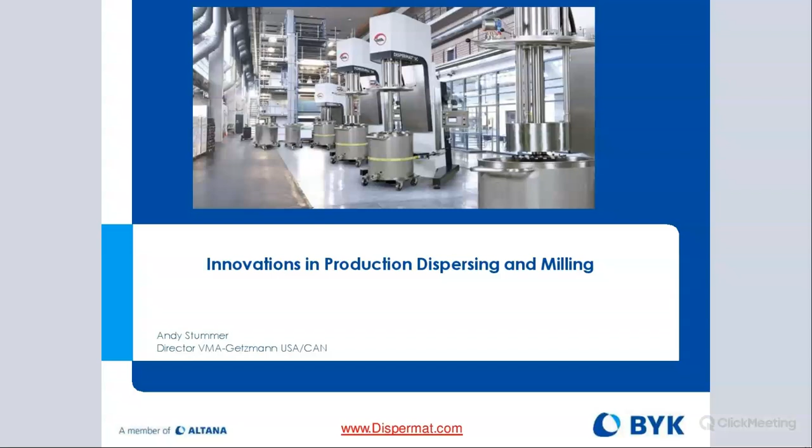Today we're going to talk about the innovations of production technology, and about the different dispersers and basket mill systems available for larger scale production. With that, we go right into the next slide.

We'll also have the latest and greatest laboratory models we offer on display: the new CV3 Evo that just came out, the new CN and AE lab scale dispersers, and the basket mills. So if you're over there, or have colleagues who work out of Europe, please feel free to stop by, drop in, let's have a cup of coffee, and I can give you a tour of what we have to offer.

Basically, we're going to first do a brief introduction about VMA and the relationship with BYK. Then we'll go briefly into a dispersion process overview, talk about the equipment side, and finally close off with the lab and pilot resources we offer. We have a really nice lab up in Wallingford, Connecticut at BYK USA, so we're going to talk about that and what capabilities we offer.

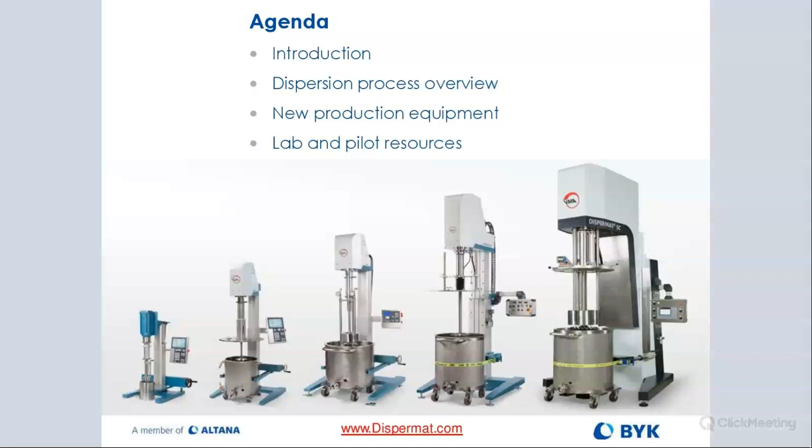So with that, we're going to look at the founding couple of VMA, Mr. Hermann and Elke Getzmann. Back in 1972 they founded this company, VMA Getzmann. Hermann still comes into the office about once a week just to make sure they still follow his design philosophy. He's a pretty nice man, and sharp, and he still walks around the facility like the day when he opened it up back in 1972.

Down below is the first Dispermat, introduced in 1973, and we still have customers - I've visited them myself - that are still running original Dispermats. So the motor technology is really sound, and these units will last forever.

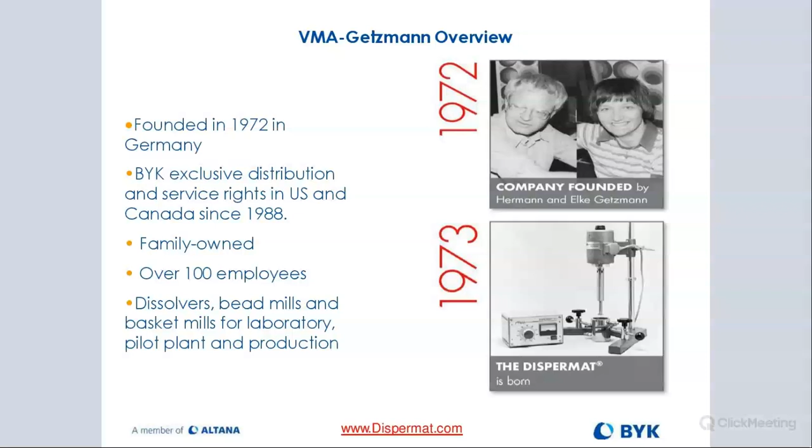About 40% of everything that VMA builds today is custom. So there's a lot of new end-use markets with different types of requirements, like fuel cell and battery, that have very special needs. So VMA is on top of those requirements and needed more capabilities from a manufacturing and design standpoint, so they had to add that space to support these new growing markets.

They also have a really good lab space in Germany and the pilot facility. So if you have colleagues over there that want to come in and visit VMA and run some trials, let us know and we can set that up. We have a number of people that come in every year, US colleagues that have businesses over in Europe, that would take advantage of that lab capability.

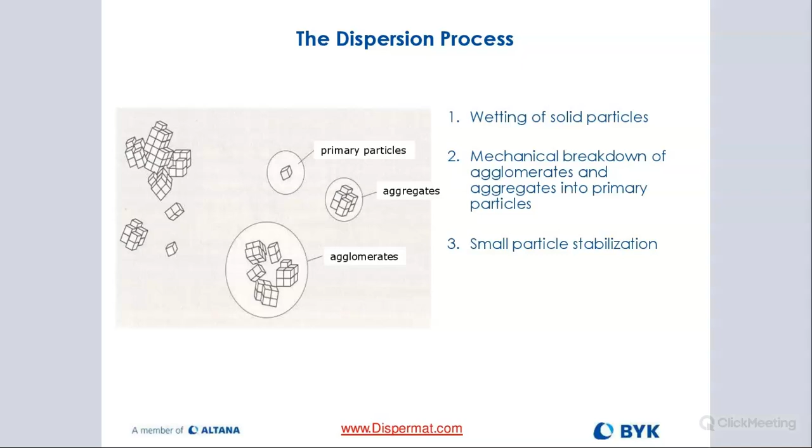Obviously, once you separate the particles, it's really important that we keep those particles in a suspended state, which requires some type of additive. Our sister company, BYK Additives, has a good selection of various additives for different markets like inks and coatings, just to name a few. And now with batteries, Erin Kelly, if you know her, they can offer some really good solutions to ensure that these particles stay in a suspended state.

In the case of a horizontal mill or a nano basket mill, particles as low as 100 nanometers and less with the right setup. And again, stabilization of the particles is critical to ensure that they don't flock back together and form new clusters.

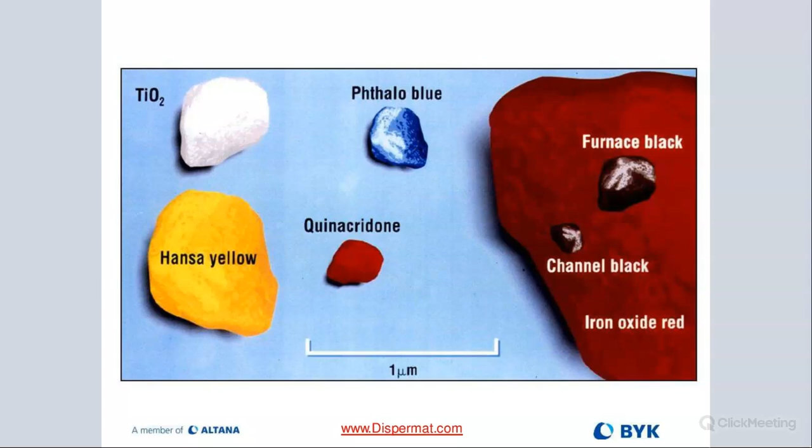On this particular slide, it's very important to understand at what point we are moving from a dissolver, which is basically just a Cowles blade or a high-speed mixer as some people refer to it, over to a bead mill. Usually the threshold is about 10 to 30 microns, but that really depends on the formulation, the type of product you're making, and additives that go in there. So, usually 10 to 30 microns is the threshold.

And then there are also some types of vertical bead mills, like pot mills, as they're referred to. They are more used for laboratory and small pilot because it's very difficult to scale them due to the volume of beads that you would need in a manufacturing environment. But you can see that if you have the right bead mill, you can get down very, very small in particle size.

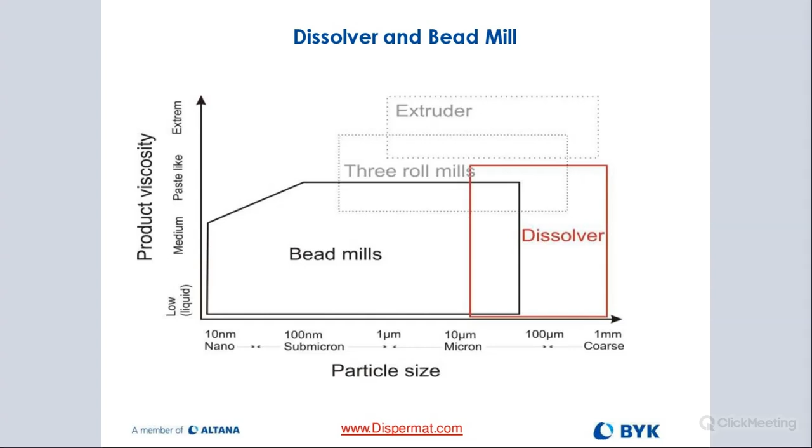And we had some cases in automotive and battery applications where we are below 50 nanometers now. It's pretty impressive. You need a lot of time and very small beads to get there, but it's definitely possible. So in a nutshell, the dispersion process is always two parts.

We first pre-disperse by using a dissolver, and there we have for production the Dispermat SC we're going to cover. Then once we've pre-dispersed and get to about 10 to 30 microns of particle size, we do our fine grinding or milling or fine dispersing processes, where we have different milling options.

We have our vertical bead mills, milling system called APS. We're going to talk about and show you a picture. That's more for lab and small pilot.

Then we have the basket mill approach, which is really nicely scalable all the way from lab to pilot to manufacturing, Torusmill SK, with the quick change system that we have, where you're able to go very quickly from a dissolver setup over to a basket mill setup, giving you the advantage of having one piece of equipment for both your pre-dispersing as well as your milling.

And then horizontal bead mills are well known, and there we have the series RS, different chamber volumes depending on how much you want to make per hour. But these are the three different milling technologies that VMA offers, and that's what we're going to be talking about today.

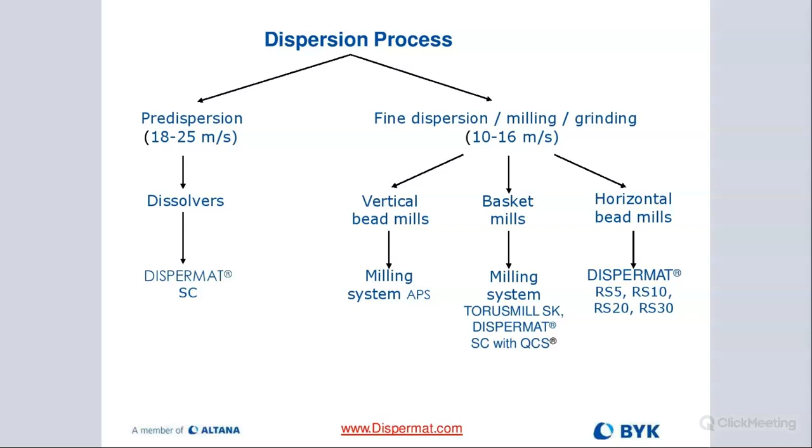We hear a lot from people that are in the battery world. We're actually going to be at the battery conference in Orlando in three weeks, and then we have one coming back up in, I think it's September or October, up in Detroit, the large battery show, and we'll have our units on display. But many other end-use markets, cosmetics is another big one where they use that type of technology to reduce particle size.

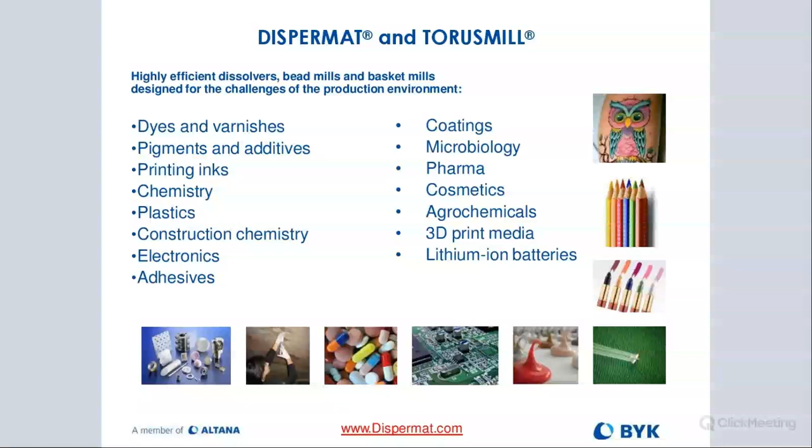So the Dispermat SC is our dissolver for production. We have output anywhere from 15 to about 55 kilowatts. We can go up to 2,000 liters of slurry, which would require a 2,500 liter container.

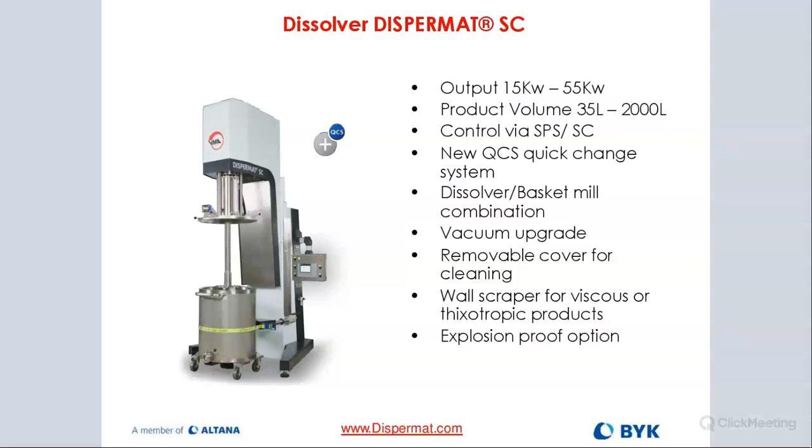And then we have the explosion-proof models and the Dispermat SC as well. So this is something that we offer depending on the environment they go in. And then we offer also the vacuum, as I said, so that allows you to pull the air out and flush with nitrogen or argon or any inert gas if you want to have that type of environment, or create a blanket of these type of environments.

Don't need so much space. So there's a lot of advantages, right? You would have only one piece of equipment really instead of multiple pieces, because of what customers have been doing.

Let's say you have a coatings operation and you have many different color families, and orders come in. Instead of tying up a machine all day or half a day for cleaning, what you can do very simply is remove the basket, do a quick flush, and then replace it with the basket of the next color family that you're running. So that would then allow you to always utilize the equipment and not be tied up for cleaning. So that's really, really helpful.

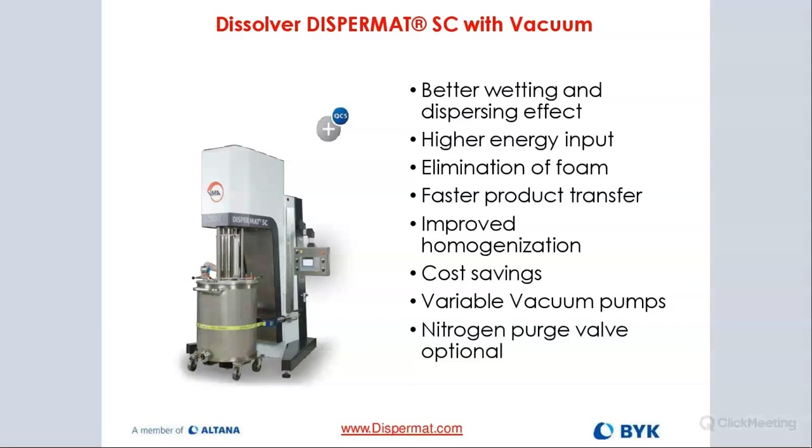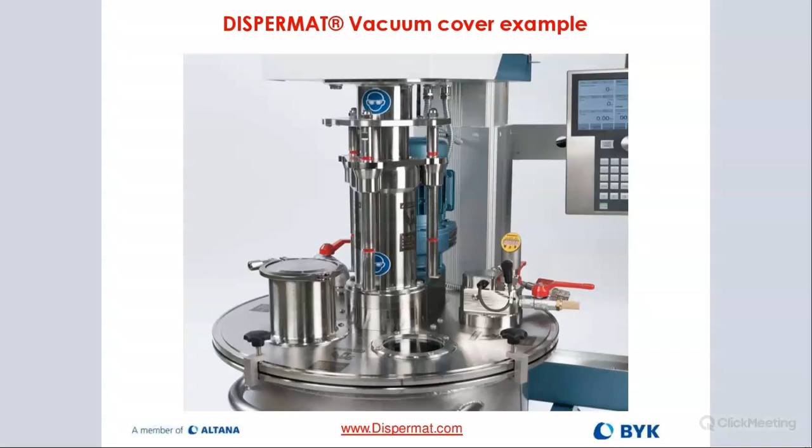It really was born out of the lab environment, and then progressed all the way up from pilot to manufacturing. So we have a number of customers now in a production environment where it's very helpful to understand how the batch is developing and how the milling process is progressing during the cycles. Here you can also store data and export it to an Excel lab report and so on.

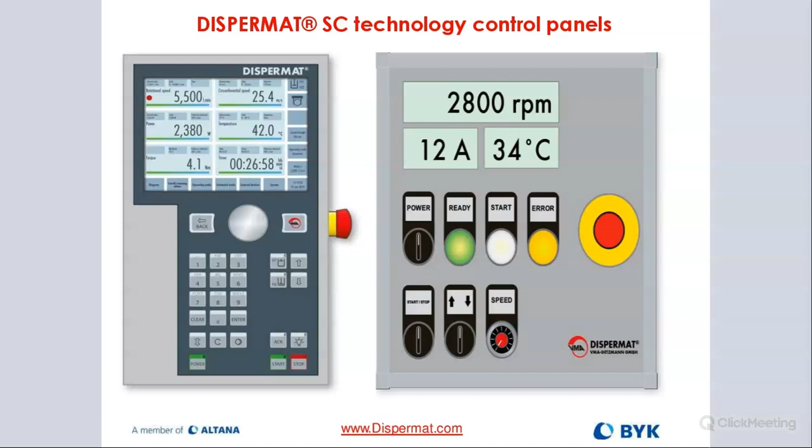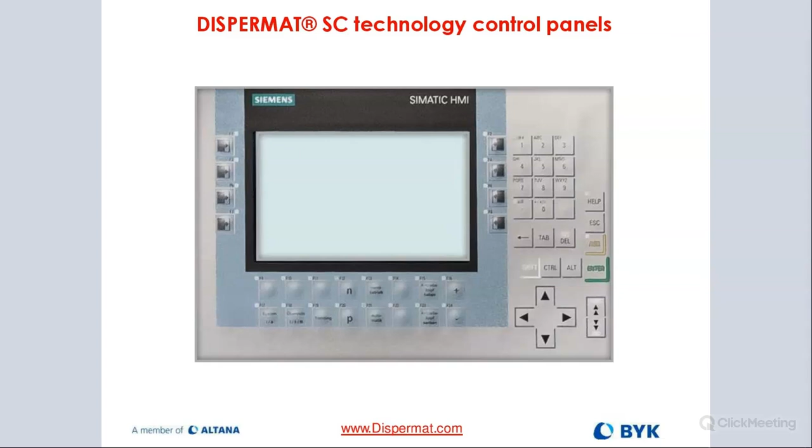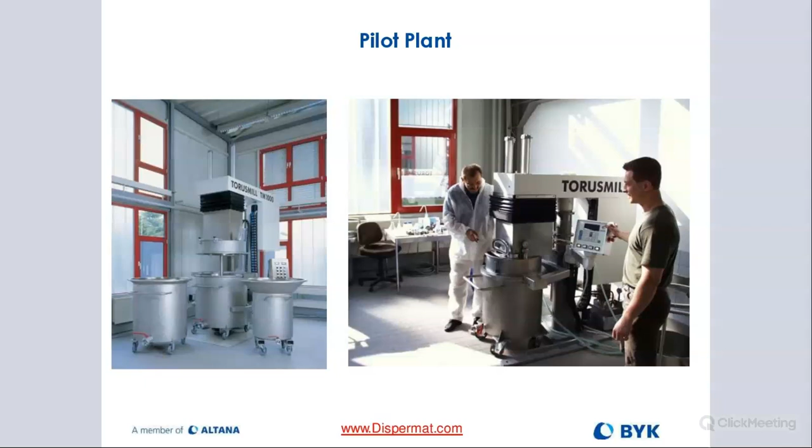And then we have something really unique and very cool for some customers doing products where they never worry about color change - we're doing the same thing all the time. We want to pre-disperse and then we want to mill. So with this machine, called the Dispermat TM, it's basically a 2-in-1. You don't have to add a basket mill to it, it's already there - you have a dissolver and basket mill combo. By the push of a button, the basket will then come down and you'll be able to do milling.

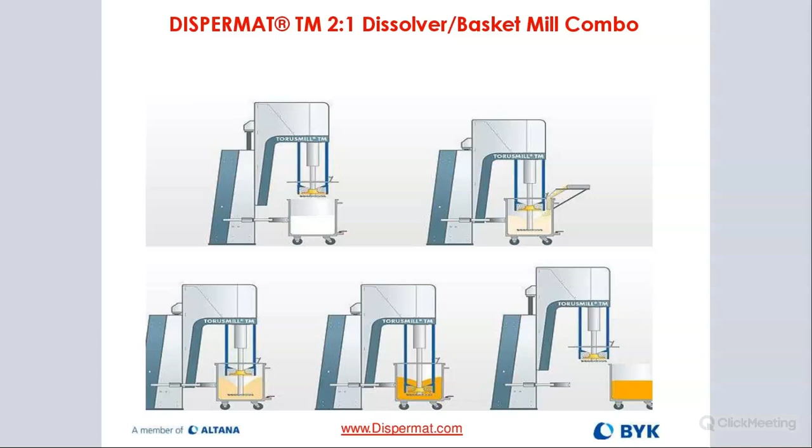At that point, we push a button on the panel and the basket comes down, and now we're actually milling. That allows us to really go down in particle size into the nano range if we have to. And then we are done - we just remove the container. That's done on one machine, in one location, in one operation. Very, very cool and easy to use, and we have a number of customers who really enjoy using that machine. Again, we can go up to 55 kilowatts.

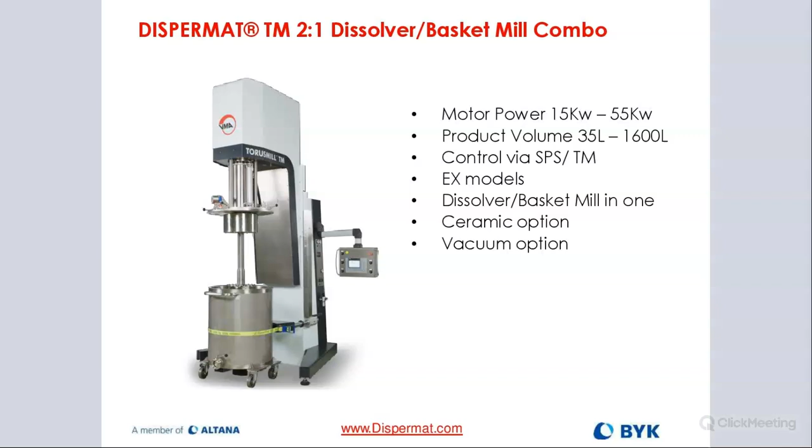We have 1,600 liters of volume, a little bit less than on the regular dissolver, because the mill head, the basket mill, has a lot of weight, and that's also a space issue, so we had to go from 2,000 liters to 1,600 liters. But again, different control options and explosion-proof models are available. We also offer vacuum, and for batteries or certain types of coatings, we offer ceramic components to ensure there's no bleed-in from the steel or metal milling components into your slurry. So that's also optional.

Here's another picture showing how it works with the TM. First we pre-disperse some material, and once we reach the right particle size, we start the milling process. The beauty is that I can use our TM in the lab and then scale it up to the TM in manufacturing very easily. All of our equipment has one huge advantage: it's very scalable. It's really nice developing something in the lab on a smaller scale, like a TML1 or TML5, and then upscaling it to the large production machines.

It's also relatively easy to clean. Once you're done, you just remove the container. Containers can be shipped with wheels, forklift channels, or both, so some people prefer forklifts, especially with very large containers. You would just replace that container with another and have cleaning solution or water in it, about 50% fill rate, then submerge the mill and run it for a few minutes. Rinse and repeat, and that does a really good job cleaning it. If you're not changing colors, you probably won't even have to open up the basket and drop the beads -- you can just do the flush and get a really good rinse that way.

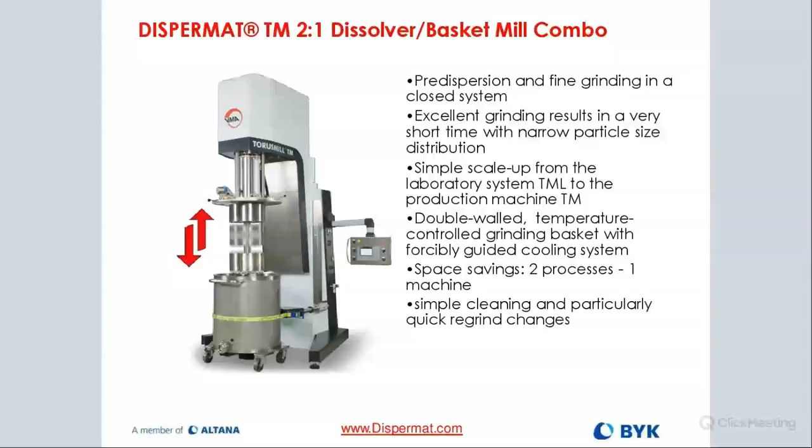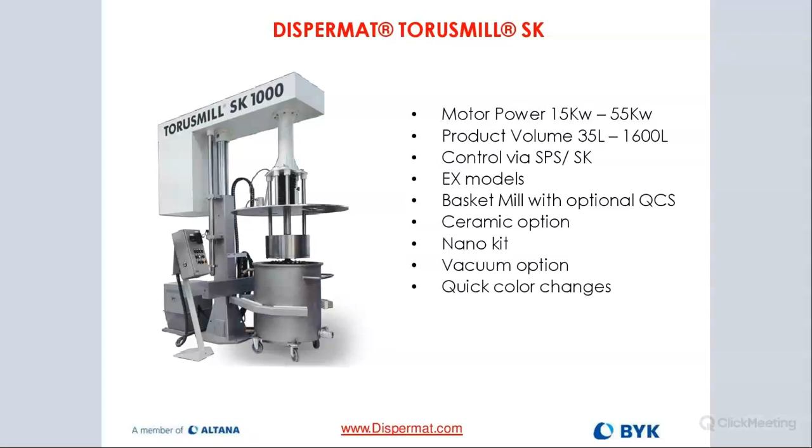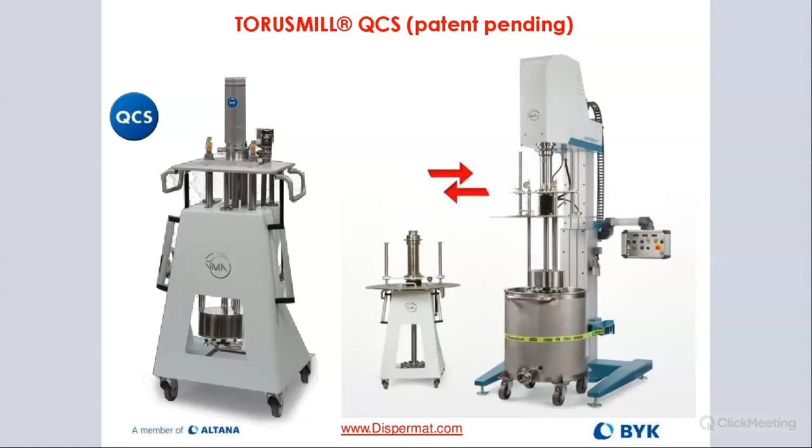That is definitely something you want to look at, and we offer those options. That's how we go about changing over from a basket mill to a dissolver head, by using these transport trolleys. They're very easy to move around with handles, so you just put the trolley underneath the machine. The container is removed, then you drop down either the dissolver or the basket and line it up. One person can do it, no problem, and you can complete that changeover in less than 5 minutes. There's only one cable you need to unplug, the power cable, and that's it on the cover. Nothing else to worry about.

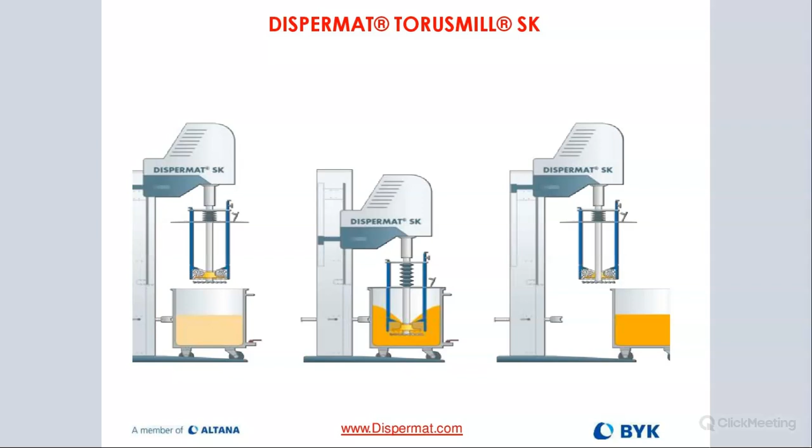So that's just a quick photo of the SK, self-explanatory. Put your container with the pre-dispersed material under the basket, lower the basket, do your milling, and then you're done. This is a graph of our basket mill design.

Some of you may have used immersion mills from other manufacturers, which have screens on the side wall of the basket. Here you can see that the side wall on our basket is closed. Our screen is actually on the bottom. If you look at the graph, you'll see the screen is on the bottom.

When we are milling, the milling disc will throw the beads around the milling chamber with very high force. If we have a screen on the side, those beads will impact the screen nonstop, leading to very high screen wear, meaning you'll have to replace your screen all the time. By having the screen on the bottom, we've seen screen wear reduced to a minimum. That's one huge advantage.

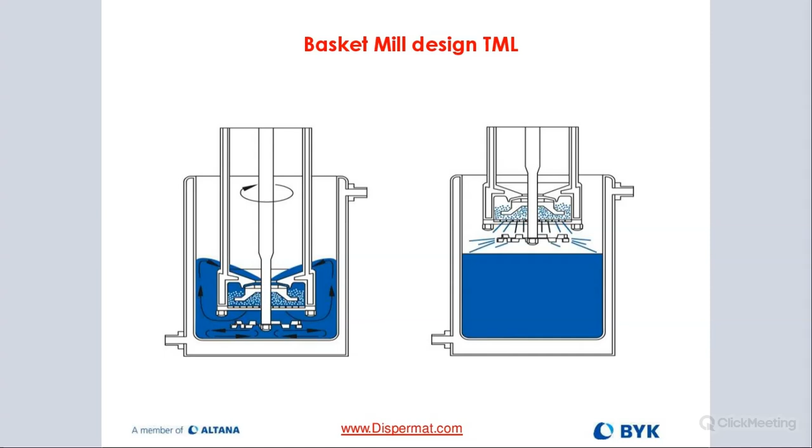A much bigger advantage we find is cooling. All of our basket mills, except the very small TML05 for the lab, have cooling capabilities. With the basket mill, we have bars that hold the basket on the left and right, and one in the back, so there's 3 bars. The bars in the front have cooling lines going through them, and the baskets are double walled, meaning the cooling fluid runs through the entire basket, even the top portion, ensuring optimum cooling of the mill base where we're putting in all the energy.

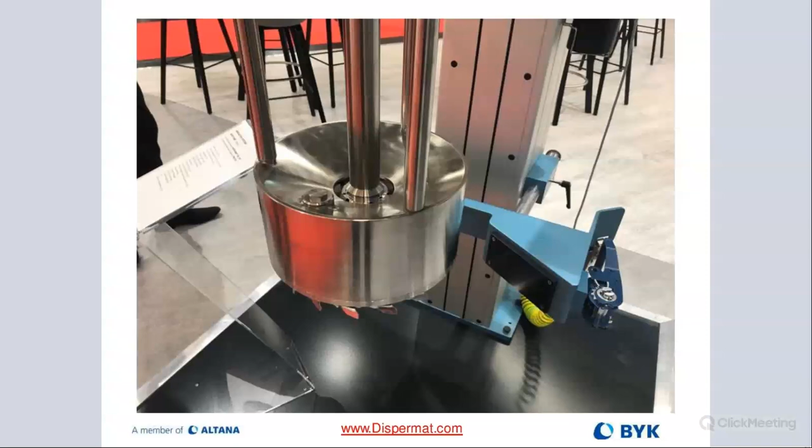We're able to measure the temperature with a PT100 probe installed in the bar behind, which you can hardly see, behind the bar on the right. There's another bar in the back, the third bar holding the basket in place, and that's where we have the PT100 probe that measures the temperature inside the basket. Optimum cooling is critical, and our design is different for optimum cooling and reduced screen wear. It's very important to understand this when looking at mill designs.

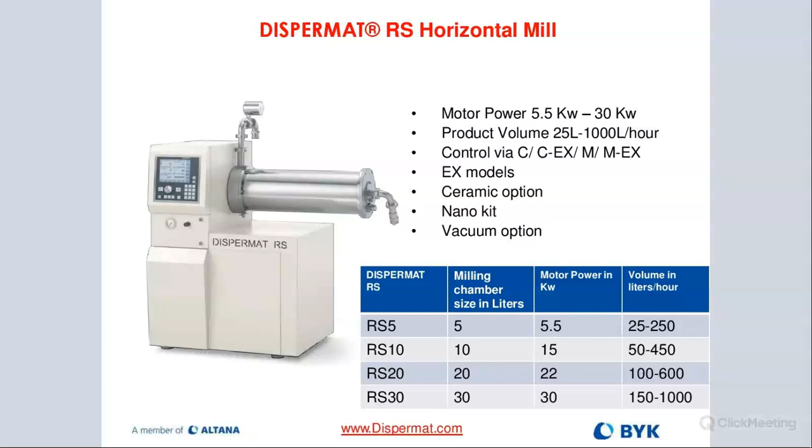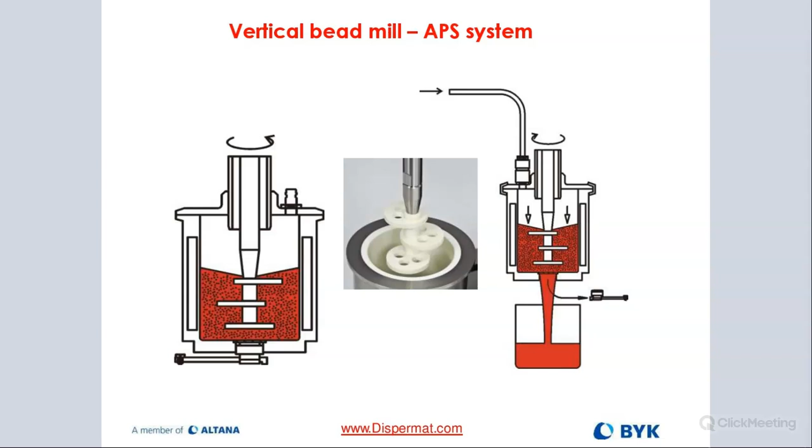I can put 100% beads ratio to my slurry ratio here—if I have 100 milliliters of slurry, I can add 100 milliliters of beads, which is great because I can do very quick milling with that many beads. In the laboratory it's easy to handle, no problem, but as we go up in size it becomes a lot more expensive and tricky for bead handling.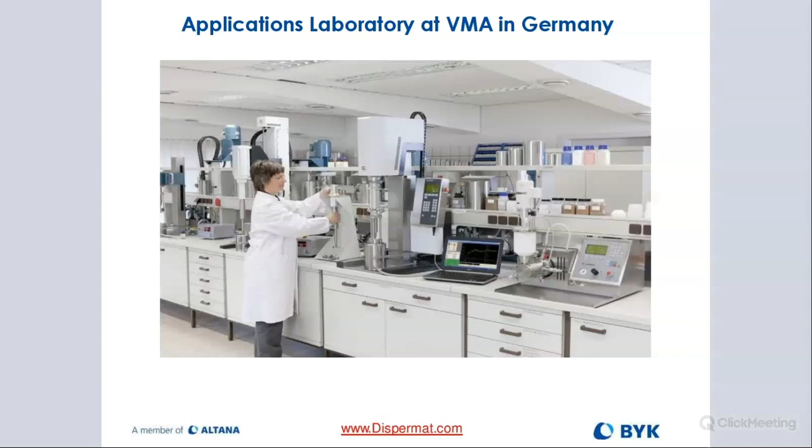We also have another super well equipped area we're going to update this picture for—come March we'll have a lot more equipment. We're getting a vacuum system, a VL unit, and the horizontal mill back that's currently out on loan. We have a new CV3 Evo, the brand new laboratory scale dissolver for best upscale performance on the market, allowing you to do milling, use it as a vertical bead mill with APS, or put a rotor stator on it. It's a really cool small machine—check it out on our website, it's available now. There are two versions: one with a scale, the advanced version, and the AE with a C control panel for scaling so we can demonstrate that technology. And obviously the horizontal mill as well.

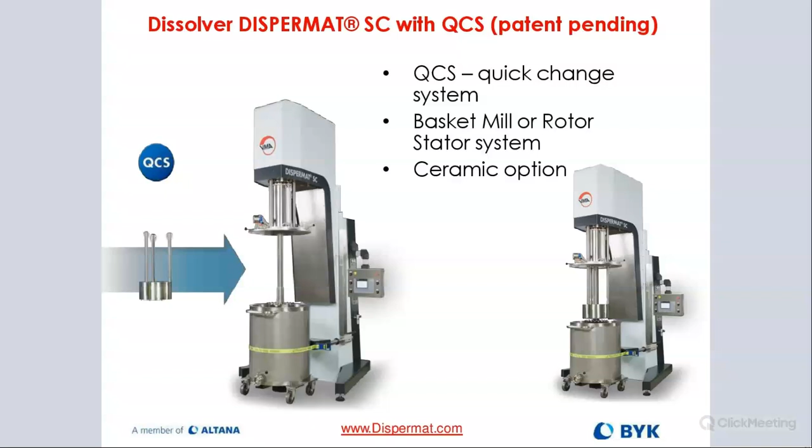Yes, there is some destructive milling going on for sure, but that is not really the goal or the point of this type of equipment. So it really depends on what it looks like and what particle size you're looking for.